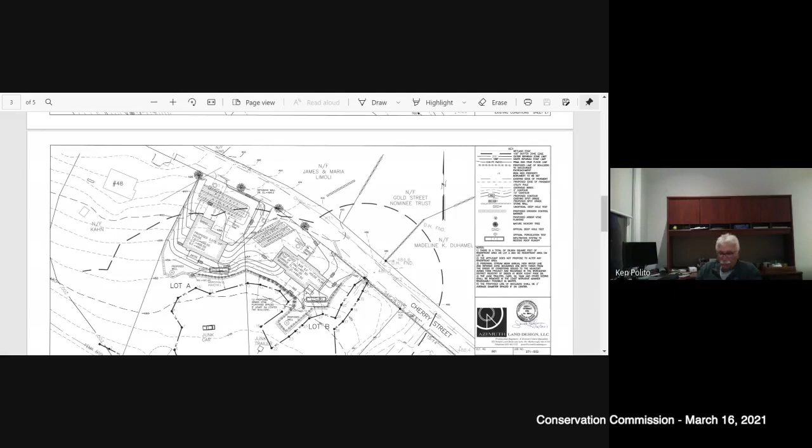Okay. All right. We went to the public and we didn't receive any feedback. And James, are you comfortable with closing the hearing tonight then? I guess so, Mr. Chairman. I understand that one of your members is not here, but I hope you still get a good vote even without him. Okay, so I take that's a yes? That's a yes. Okay. Anybody in the commission have any objections to closing the hearing tonight? Okay, I see heads shaking. So we will close the hearing, James. Both hearings are closed.

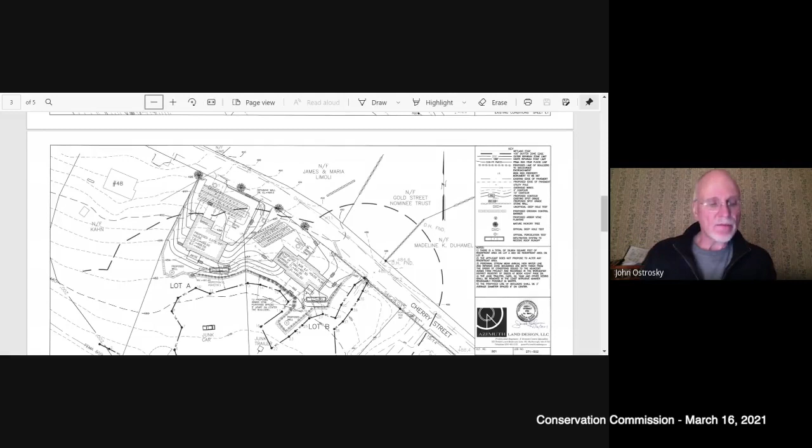Okay, moving on to our next hearing. Our next three hearings are going to be continued. I will go through them individually. The first one is a continued public hearing regarding the notice of intent filed by Equestrian Building Company for driveway construction, utility connections, and drainage connections at 183 Spring Street. That will be continued until our next meeting, which is April 20th, 2021.

The next hearing is a continued public hearing regarding the notice of intent filed by Equestrian Building Company for the construction of a single-family house, utility connections, and stormwater management systems at 185 Spring Street. That hearing will be continued until our next meeting, which is April 20th, 2021. The next hearing... Mr. Chairman? Yes. Yep. The next one, I did not get a response when I tried to reach out by email regarding the continuance. So I would suggest checking to see if anyone's here for that first. Okay, all right, I'll do that.

Thank you. Do we have anybody representing 23 Shirley Road here tonight? As Brad said, he tried to reach out to the people to see if they would be attending tonight's meeting. This hearing's been continued for a number of our meetings already. And I'm not hearing any response. So we will continue this one. I'll read it officially. This is a continued public hearing regarding the notice of intent filed by Asty Daces for the backyard hardscape and landscaping, including retaining wall, walkways, stairs, and planting at 23 Shirley Road. We will continue that hearing until our next meeting, which is April 20th, 2021.

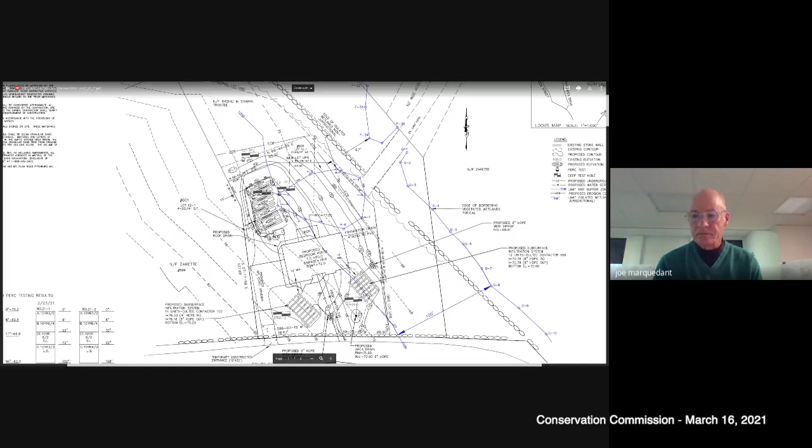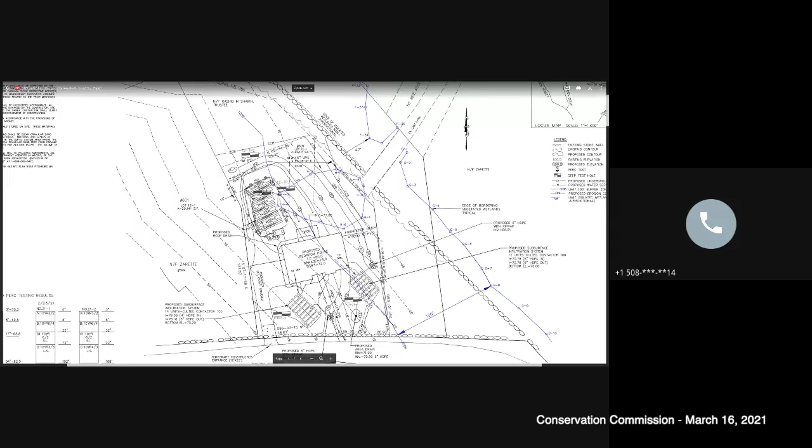We updated the set of plans to include some construction details for the installation of the erosion control barrier that runs along the right-hand or easterly side and then across a portion of the back. I think Mr. Stone thought we were slightly lacking in some of the installation details, and that info has been added to the plans. And I'm sure you're all aware that we have also been issued a file number by DEP. And that is generally what we accomplished in the last month. Okay. Let's go to questions from the commission. Martha? I'm all set, thanks. Bob? I have no questions at this time. Ken? I'm all set. Brad?

The only comment I have: at the last meeting, I had requested that straw wattles not be used, and it looks like one of the details was changed, but there's still one on there that shows straw wattles. So there's a little bit of a conflict there. Oh, I apologize. I missed that. I must not have taken very good notes. The intention was to get in line with the commission. I apologize. That's all I had, Mr. Chairman. Okay. Let's go to the public with any questions or comments. Is anyone out there in the public who would like to speak? All right, I don't hear anyone.

So, Brad, are you comfortable with Joe revising the plan and just updating it with the hay bales in lieu of the wattles? Yes. Okay. Is everyone on the commission in agreement that we can close this hearing? Can you shake your head or say yes? Yep. Thumbs up. All right. So we will close the hearing, Joe. You're all set. Great. Well, thank you very much. Yep. Just revise that plan and get it to Brad with regards to the wattles. Okay, thank you.

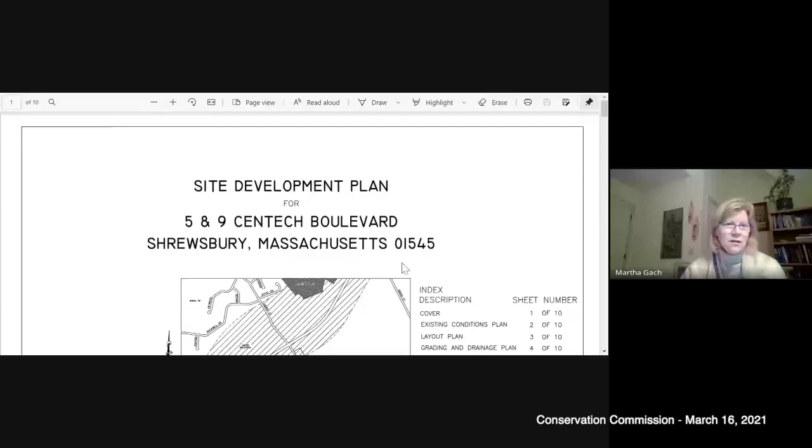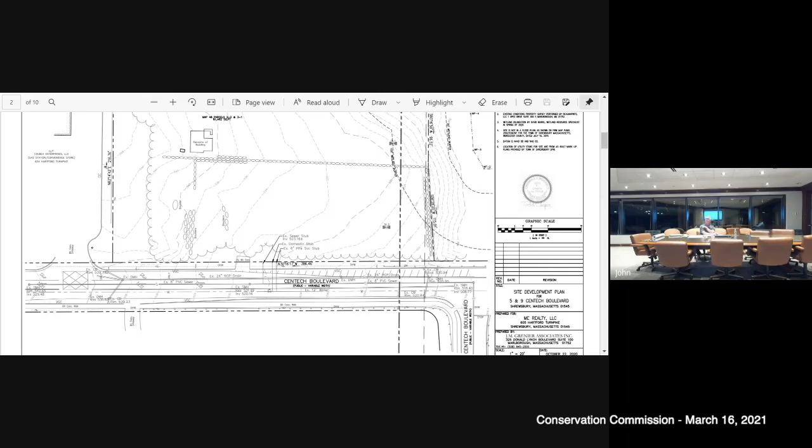It is. It's a large, wide stone boulder pile. You can come down to the existing conditions plan. Ooh, you went a little too far. There it is. And what she's talking about is there is a wide boulder wall that's located right along there. That is right along the area where we're going to be installing our retaining wall for the entire site. So there will be a conflict with the proposed retaining wall and that existing wall. If there are stones that are over the property line, obviously we wouldn't be touching those, but there is going to be disturbance to that wall. Well, thank you.

Bob? Yes, John, I think I've expressed this to you before. My biggest concern with this project, because of the nature of the soils and the glacial tills in Route 20, is siltation during construction, especially since, as you stated, there's quite a bit of cuts and fills going on this property. I think it's absolutely critical that any precipitation and runoff during construction be contained on site and allowed to settle, and in fact even provide for some treatment if necessary prior to discharge off the site. And so could you kindly explain for the record how you plan to do that?

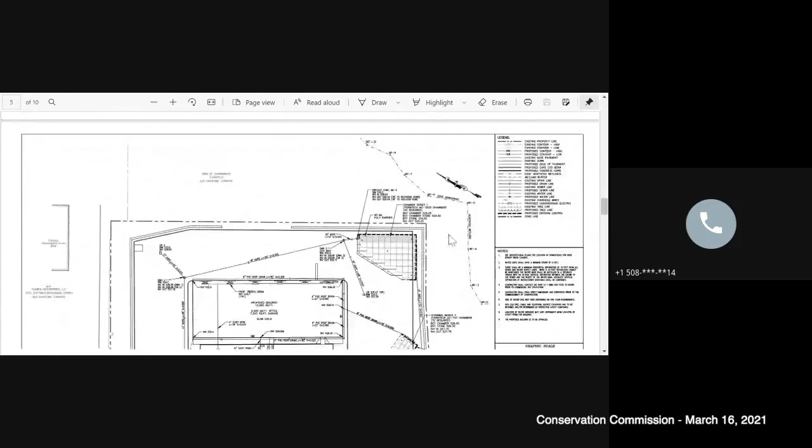Yeah, let me get to the grading and erosion control plan. Bob, wait a second, let me get to the correct sheet. My mouse gets a little jumpy here.

Here we go. Yeah, Bob, on the southerly side of the parcel, as they bring in fill, they're going to be constructing this wall. So this wall, the retaining wall, is going to act as a pseudo dam. We are proposing to take this area on the southerly side, which is the direction, obviously, that the flow goes right now. The higher elevation side would be on your left side of the sheet. The lower elevations on Centech Boulevard to your right.

So we are going to have a basin constructed here, temporary during construction, and that would hold, I believe, through a 10-year storm. But obviously, if there's multiple rain events, they would have to pump that out and make sure it has enough capacity if there were back-to-back storms. But this is, if you can see, almost, I'd say, half the size of the building or close to it. So the footprint is at least 5,000 square feet, and we have that to hold quite a large volume of water, so that during construction we can contain water on site.

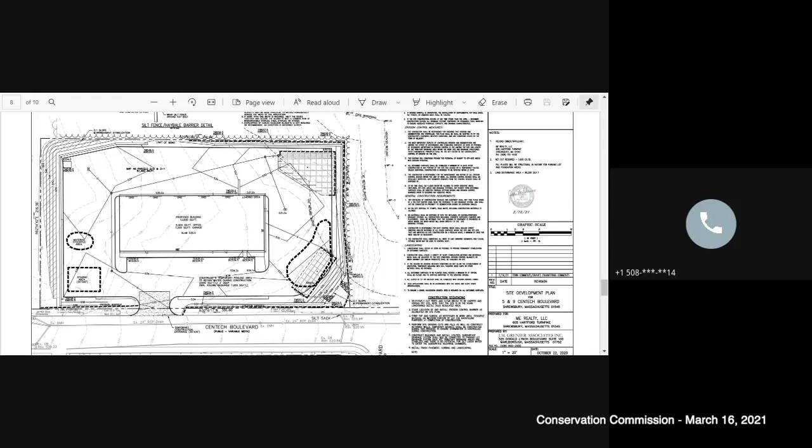Thank you, Mr. Chairman. Ken? He's recused. Oh, that's right. Ken is recused on this one. Brad? I'm all set.

Yeah, John, I'm just looking at your construction sequencing. I'm not sure if I'm on the most current plan, but on the construction sequencing, it's note 4. It says temporary basins shall be constructed during this process to ensure stormwater is controlled during construction. Yeah, if you can reference them, like Bob said, to that more detailed, specific sequence. Sure. What you expect this temporary basin to be, and when you would implement it too in a storm event.

We don't want to implement it when all the silt's running down the road. Right. Then it's too late. Yeah, but you did have some mention of it, at least under the construction sequencing, but it's just a brief passing mention. Okay. All right. Let's see. Brad, are you all set? I'm all set. Thank you.

All right. Does anyone in the public have any questions or comments on this hearing? All right. I don't hear anyone. Brad, are you comfortable with getting that sequencing for the temporary basins submitted separately, or would you want to keep this hearing open? That's really up to the commission, but I think that that's something that our department can review, and even that's part of the stormwater management permit application as well. There's a lot of things that tie into stormwater these days.

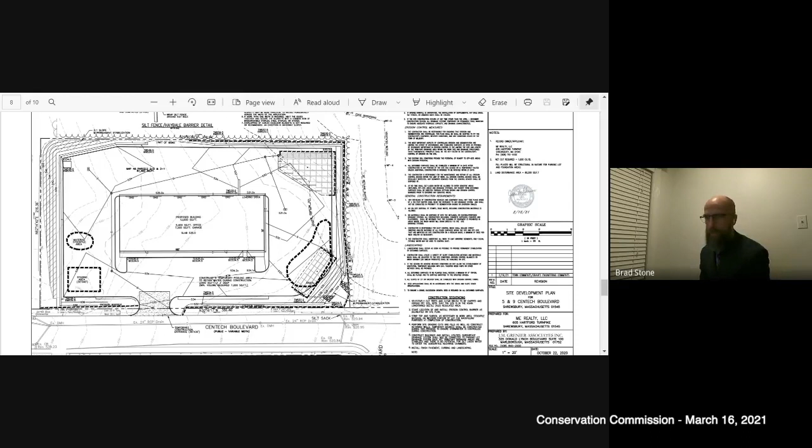Okay. So whether the commission asks for it or not, I'm pretty sure my department's going to be asking for the same and similar things. That's good. All right. Is everyone in agreement on the commission that we can close this hearing tonight? Shake your head or say yes. See Martha shaking. Ken's good. Okay, Bob. All right. John, we'll close the hearing. Thank you very much. We appreciate your time. Okay. Don't go far. You're on again.

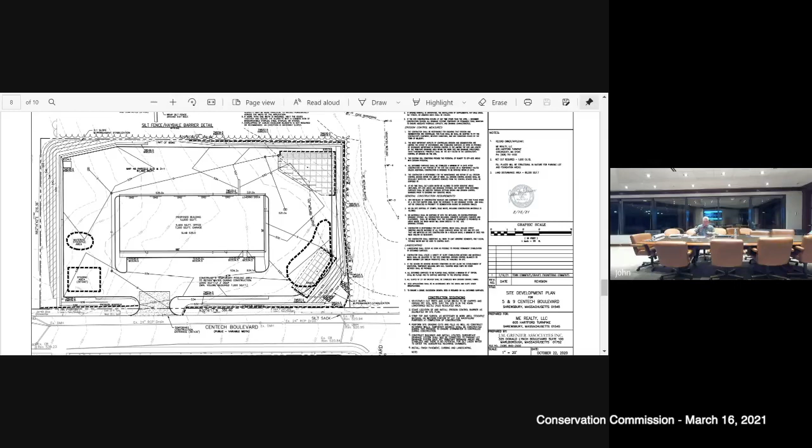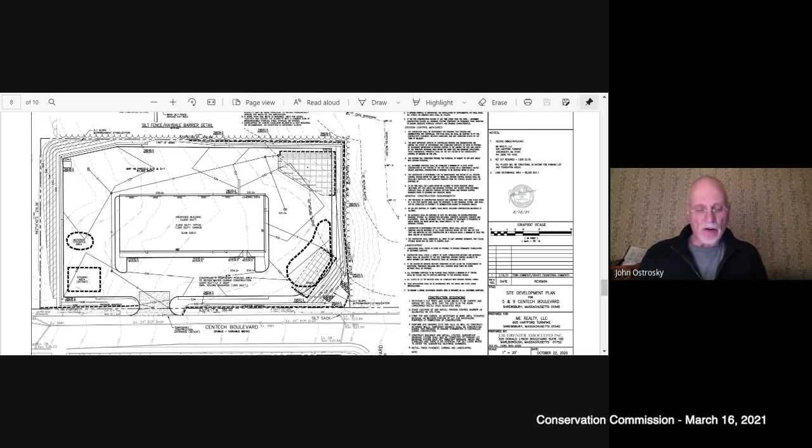I'm here. Okay. We have another continued public meeting regarding the notice of intent filed by Leuven Realty LLC to construct a 4,080 square foot medical office building, paved parking area, stormwater management facilities, and site grading at 235 Main Street. John and Richard? Thank you, Mr. Chairman. I'll let John go forward with the technical issues that you spoke of earlier. Okay.

John, before you start, let's get Brad in on this. You know, he's done a little bit of looking, and he can tell us where some of the weaknesses lie. Brad? Okay. Just if the commission recalls, I think the last time this was presented was back in January. One of the things that I wanted to see was the wetlands flagged on the site. I'm not sure if that's been done or not. I have been out to the site. I haven't seen any wetlands flags.

The one area that I really want to see reflagged is towards the westerly side of the entrance driveway. I think the resource areas in terms of the pond and the stream that's on the easterly portion of the site, I don't see the need to reestablish those prior to construction. You know, what's on the plan looks pretty accurate, but the reason why I had the comment a couple months ago is the BMPs, the infiltration basin, the forebay, a lot of grading, that's right up to the wetland line in that area.

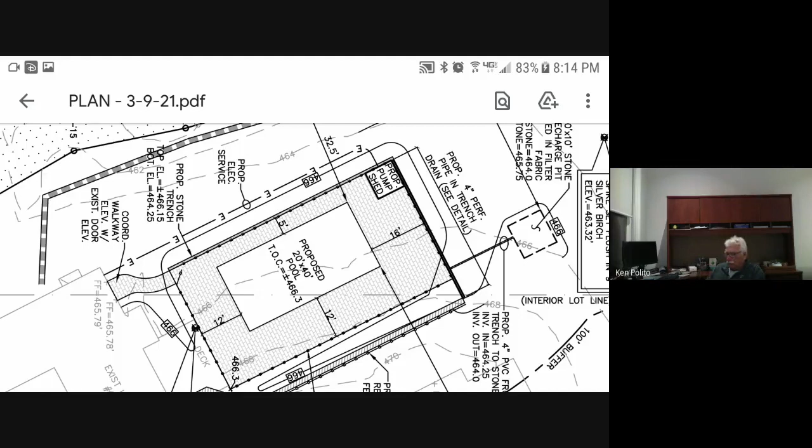Martha? I am good, thank you. Bob? All set. Ken? All set. Brad? I'm all set. Does anyone in the public have any questions or comments on this hearing? Okay, I'm not hearing any.

Brad, I take it we don't have this revised plan at the moment? No, we have it. I don't have it. For some reason, it wasn't on the drive. I have the one prior to that, but it shows the same thing other than the infiltration part. Right, but we do have the current one. It was submitted. Yes, it's on my desk. Okay, sounds good. All right, there being no further questions or comments from the public or commission, we will close the hearing. Okay, thank you very much. All right, Carl.

Martha, can you take care of the new one? Absolutely. Notice is hereby given in accordance with the provisions of General Laws, Chapter 131, Section 40, that the Town of Shrewsbury Department of Public Works, 100 Maple Avenue, Shrewsbury, has filed a request for an amended order of conditions for the installation of monitoring wells at 34 Ridgeland Road. A public hearing will be held on the above request at 7 p.m. on Tuesday evening, March 16, 2021.

All right, Lee, are you the presenter? I am, yes, thank you. So Lee Koska here from Weston & Sampson, representing the town of Shrewsbury. This is the second amendment to the initial order of conditions that was filed in the summer of 2019. We previously installed 4 monitoring wells in the vicinity of the former tank. And actually, let me share my screen here. Bear with me one moment. Okay. Can everyone see my screen? Yes. Okay.

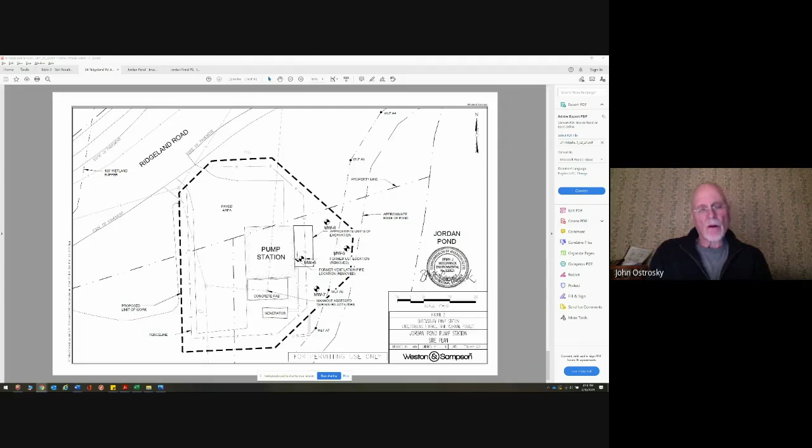All right, hearing none, we'll close the hearing. You're all set. Thank you very much, everyone. You're welcome. Okay, that takes care of our meetings and hearings. And why don't we move on to discussing and signing orders of conditions?

And well, there's no applicability. Mr. Chairman. Go ahead, Bob. I would move that we issue an order of conditions to 62 Cherry Street LLC for the construction of a single-family home at 52 Cherry Street. The only added condition that we discussed was that the size of the boulders be described as minimum 3 feet diameter. Do we have a second? Second. Okay, all in favor, and we'll do a roll call. Martha? Aye. Bob? Aye. Ken? Aye. And John? Aye.

Okay, Bob. Mr. Chairman, I would move that we issue an order of conditions to 62 Cherry Street LLC for the construction of a single-family home at 54 Cherry Street with the same added condition as the previous one. Okay, do we have a second? Second. All in favor by roll call. Martha? Aye. Bob? Aye. Ken? Aye. And John? Aye.

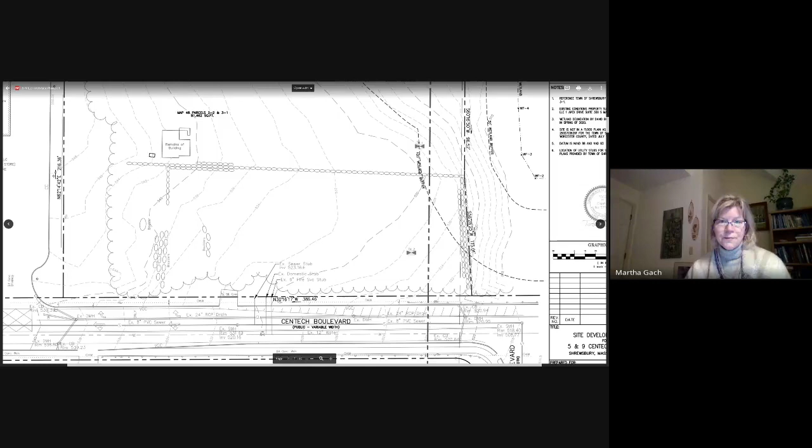Yeah. Brad, can you put the cursor over the wall? The scale's a little hard to see on mine. Because John did say that the wall was going to interfere with the new wall, correct? Wasn't that his reason? That's what he said. That wall sits at the top of a fairly significant slope, so it is already functioning as a retaining wall in some way, shape, or form. And I recognize that may not be structurally sufficient for the facility that they wish to install in here. Yeah. Under the Wetlands Protection Act, Martha, I'm not sure if we really have any jurisdiction. It looks to me like they're taking it out in its entirety. Yeah, it's gone. I wouldn't know if we would have any ability under what we're charged to do, Martha, with saving it. I hear you, but I wouldn't know.

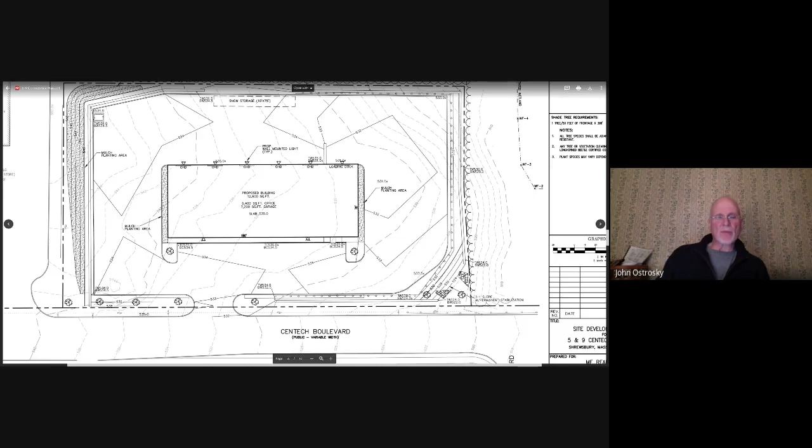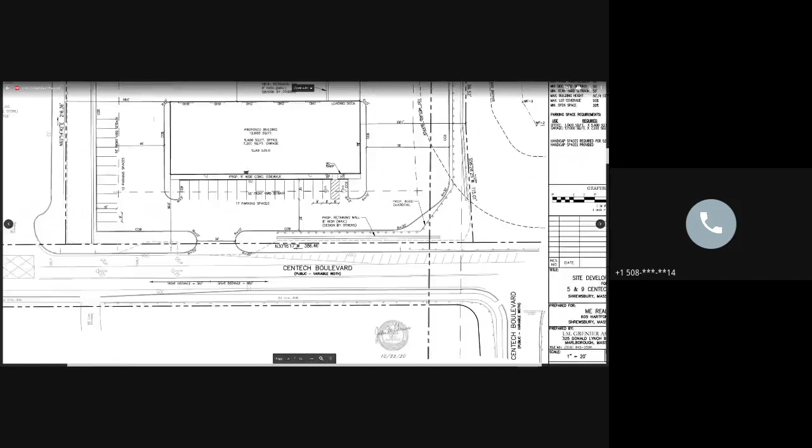The only thing I could suggest. Go ahead, Bob. Well, the only thing I could suggest is trying to reach out to the owner of the property or the developer, whoever's developing this for whichever use, and to try to, as a naturalist, talk to them about preserving this resource. And it would take some re-engineering, perhaps. Is that something, Bob? Do you think they could be relocated on the site? It takes a little extra effort. I don't know. I'm thinking of moving the new retaining wall 3 feet away from that wall. I don't know what could happen, but if Martha clearly thinks it's worth preserving, why not have a conversation?

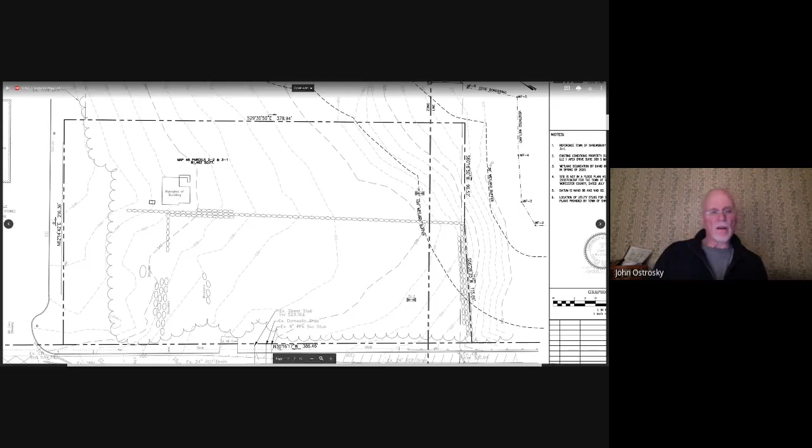All right. Well, it's got to be done within the time constraints. We've closed the hearing, so. Oh, yeah, I agree with you, John. I don't think it's jurisdictional to us. But, yeah, I know. Maybe someone with the historical commission in some official way could approach them or something. This is a matter of preserving history. Is that something you could follow up on, Martha? I would be happy to. Yeah, if you could give it a go, and we have some time before we have to issue the order of conditions, and maybe something can be resolved here with regards to that. I appreciate your thoughts. Thank you.

All right, so why don't we leave it at that? But we've got to take a vote now on whether we want to issue an order of conditions or deny it. So we've had a second, so let's go all in favor. Martha? Aye. Bob? Aye. Ken? Oh, Ken's recused on this one. And John? Aye. So, why don't you see what you can do, Martha?

Mr. Chairman, I would move that we issue an order of conditions to Levin Realty LLC for the construction of a medical office building. No, we're not. That's continued. No, not that one. 601 South. Yeah, I move that we issue an order of conditions to 7 Sherrill Drive Realty Trust to construct a single-family residential dwelling at 601 South Street, subject to the exclusive use of hay bales and silt fence throughout the project. Do we have a second? Second. All in favor? Martha? Aye. Bob? Aye. Ed? Aye. And John, aye.